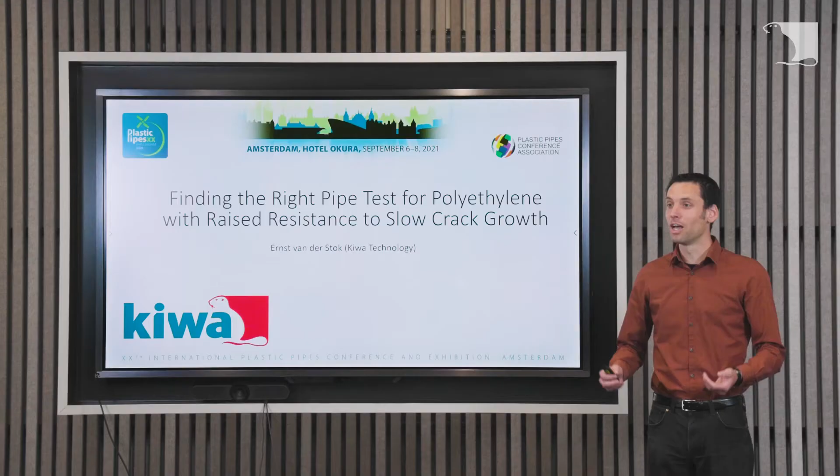I work as material scientist and consultant at Kiwa Technology here in the Netherlands. I really have loads to tell you, but unfortunately I only have 15 to 20 minutes for this presentation, so please read my full paper to get all the details. I'll try to give you some highlights here.

Like I said, it's about two pipe tests. The first is the accelerated notched pipe test, which measures the pipe's resistance against surface damage, for instance due to a scratch from unintentional installation damage. This scratch can grow further and eventually crack the pipe, so this test measures the material's resistance against it.

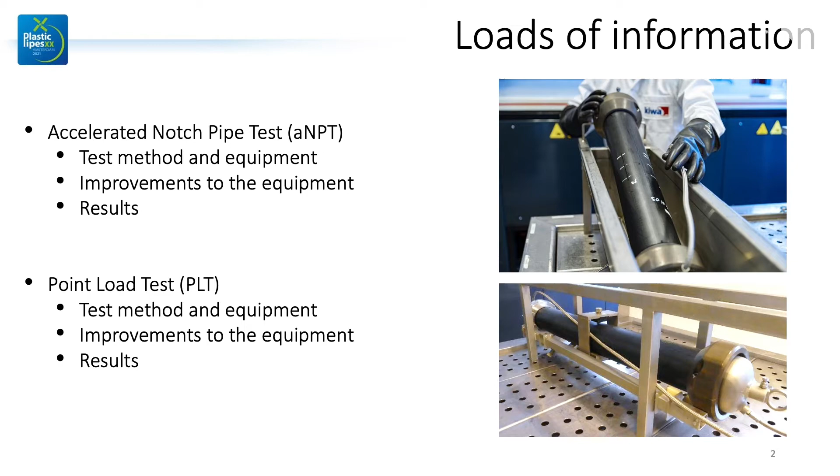The other test is the point load test. Here, the polyethylene pipe is installed perfectly well and is all undamaged, but somehow a point load, such as a stone, presses upon the pipe, causing tensile stresses on the inner wall of the pipe, which may lead to a crack. So the point load test measures the material's resistance in this case.

In this presentation I'll give you an overview for both tests about the test method, the equipment we're using, and note that these tests are still under development. We have a lot of lessons learned that I'd like to share with you so we can all benefit from it. I'll also give you some results, which are quite interesting. So let's go through it.

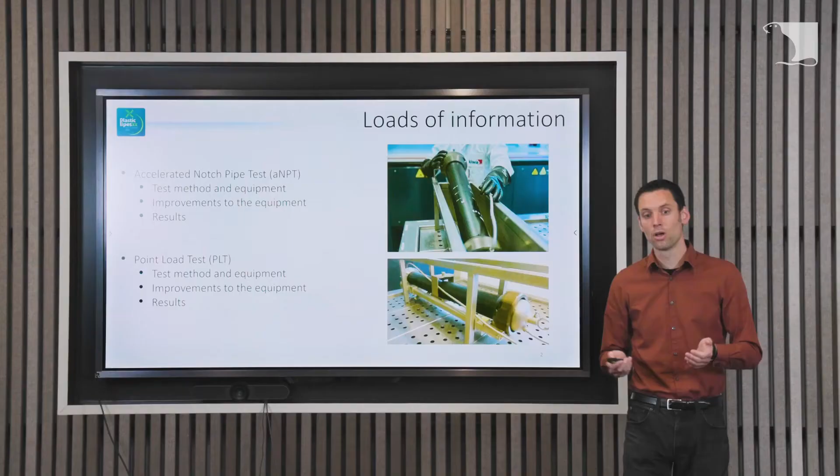First up is the accelerated notch pipe test, or perhaps better, let's start with the normal notch pipe test. So what is it? Here you see a plastic polyethylene pipe installed in a water bath, with four notches cut in the circumference around it.

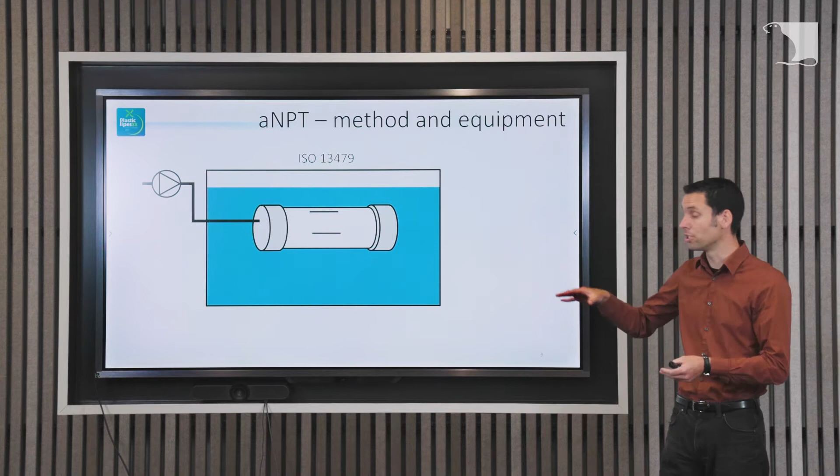The water bath is at 80 degrees centigrade, a higher temperature to accelerate the test. We have a pump to pressurize the pipe, so it's a sort of hydrostatic pressure test, but now with four notches on the circumference.

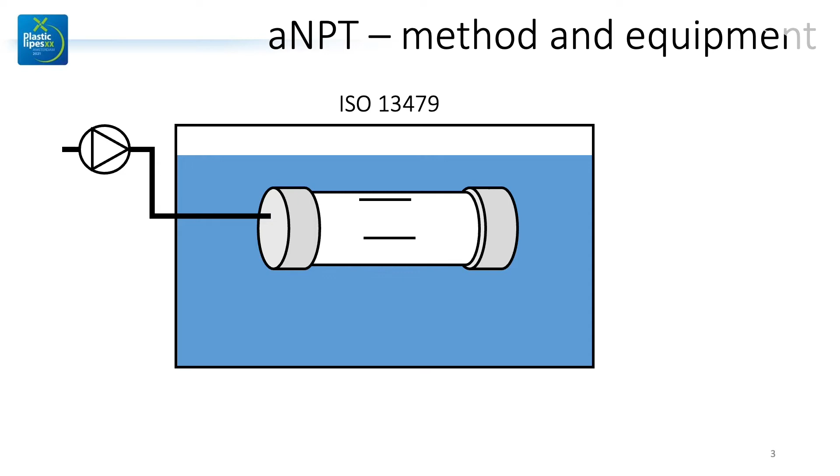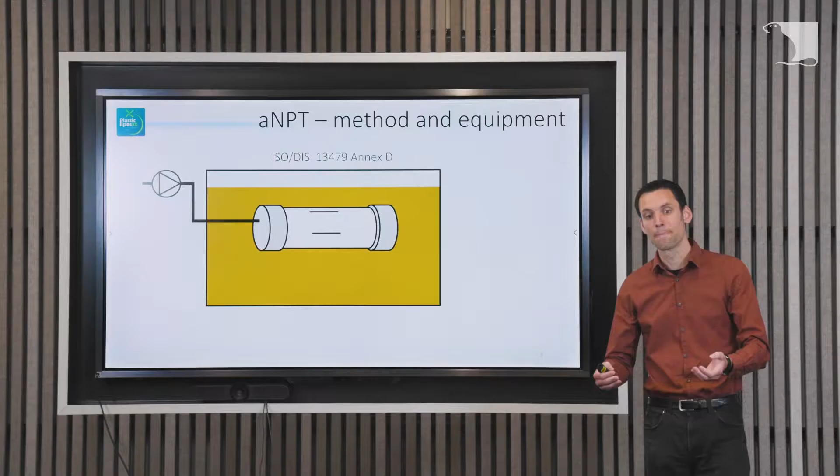The only issue is that for this pipe, polyethylene pipe with raised resistance to slow crack growth, it takes too long to fail within a reasonable time. So what can we do to accelerate it? We put in a detergent, so now the pipe is submerged not in water but in a detergent solution, which accelerates the test spectacularly.

This is also being standardized. The notch pipe test is already in ISO 13479, and this detergent method will be standardized in a separate annex and published soon. Please note that although the pipe is placed in a detergent solution outside, inside the pipe is still just water, not detergent solution.

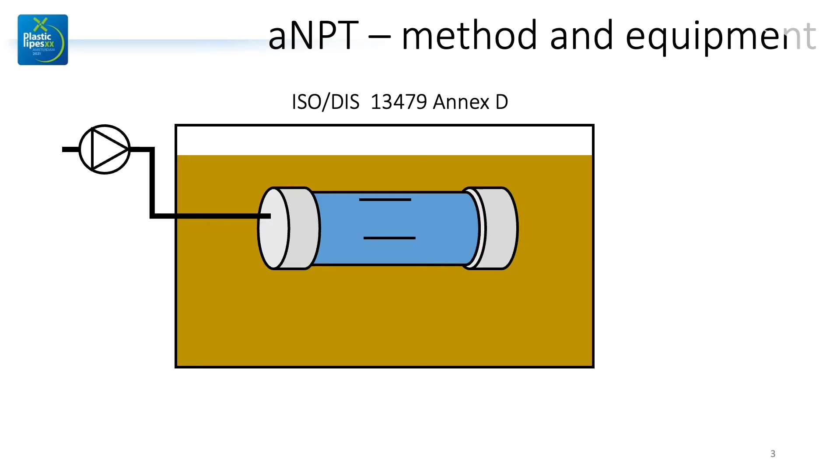The only problem with the detergent solution on the outside of the pipe is that it's a water tank of 1800 liters, and the detergent used is Arkopal, which is toxic and bioaccumulative. That means it's not very eco-friendly to dispose of the 1800 liters of detergent solution after every test.

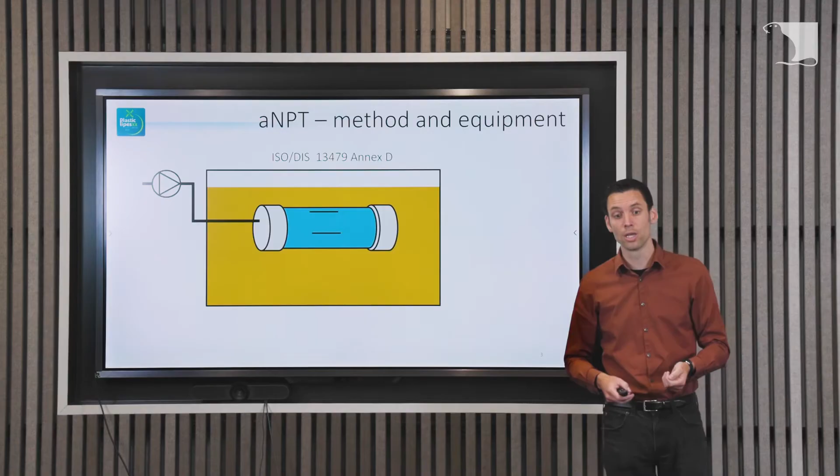So we wanted to make a more eco-friendly test. What we did is make a smaller container, which holds just 30 liters of detergent solution and is perfectly well fitted to hold the pipe and accelerate the test properly.

The only point here is that Arkopal also sinks to the bottom if it's not flowing. Normally in the large water tank it's all circulated for homogeneous temperature, but within the smaller container we don't have that circulation. So in this case, we added a separate pump to circulate the detergent solution inside the smaller container.

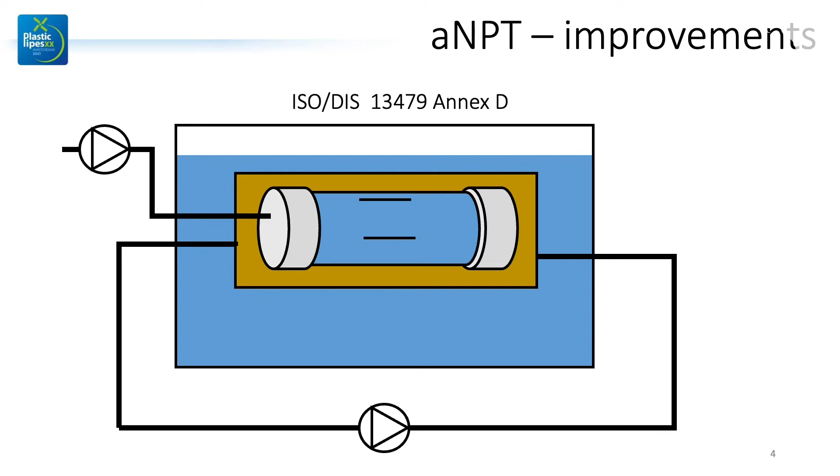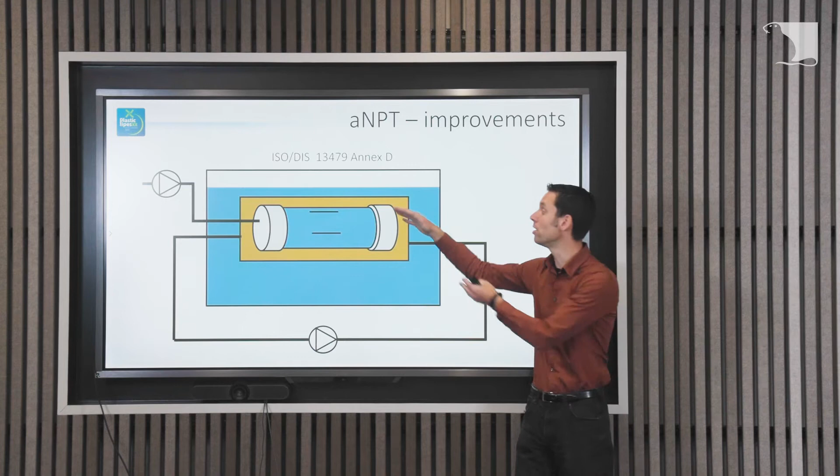It's very important that the solution is homogeneous and that the detergent really reaches all the notches, not just being aggressive to the notches on the bottom side of the pipe and not the top side. Therefore, we did some extra tests.

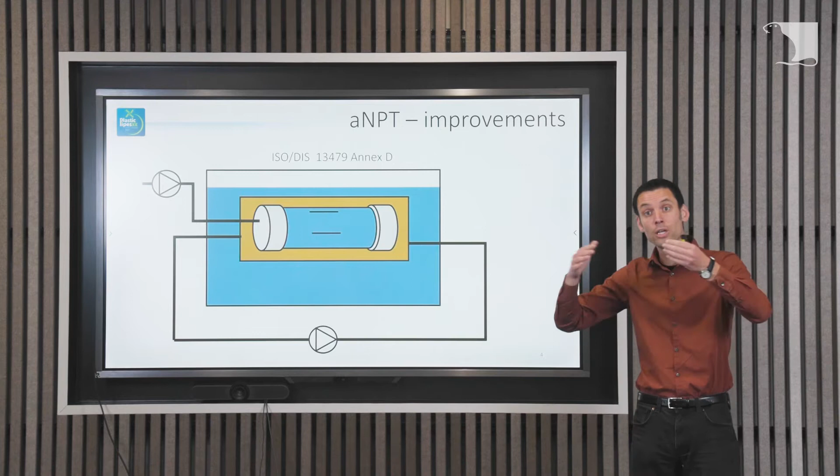So how did we do it? We simply replaced the detergent by colorant. We have a green colorant and we tested the circulation equipment to see if the colorant is really distributed, a little bit turbulent, and really gets the solution

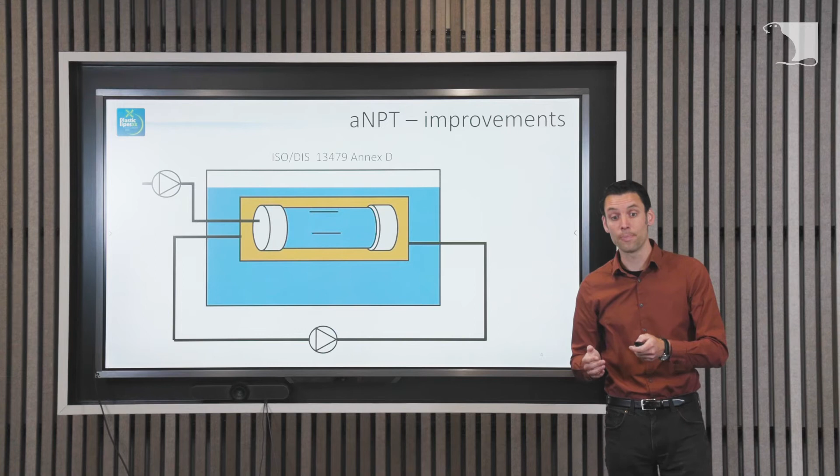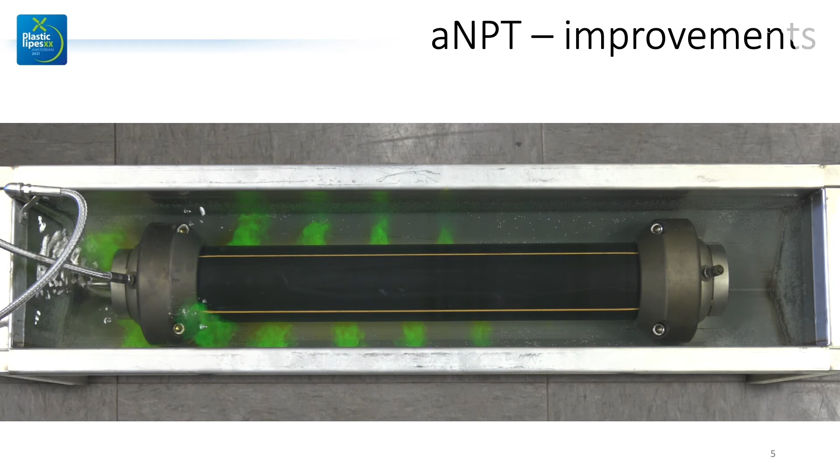homogeneous. So we made a video of it and I'd like to show it to you right now. Here we see that smaller container, we see a polyethylene pipe in the middle and we have end caps. And what we're doing now is we're letting that detergent solution enter that container.

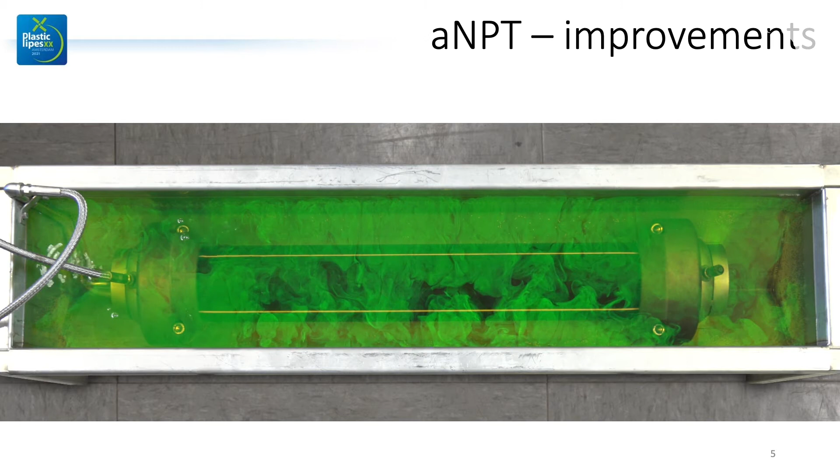So you see really, it's not the detergent solution, it's the colorant. Here you see the green colorant really circulating very nicely around that pipe. It comes to all the areas in the smaller container. So actually in a few minutes time, the complete container is completely green and it's all homogeneously distributed.

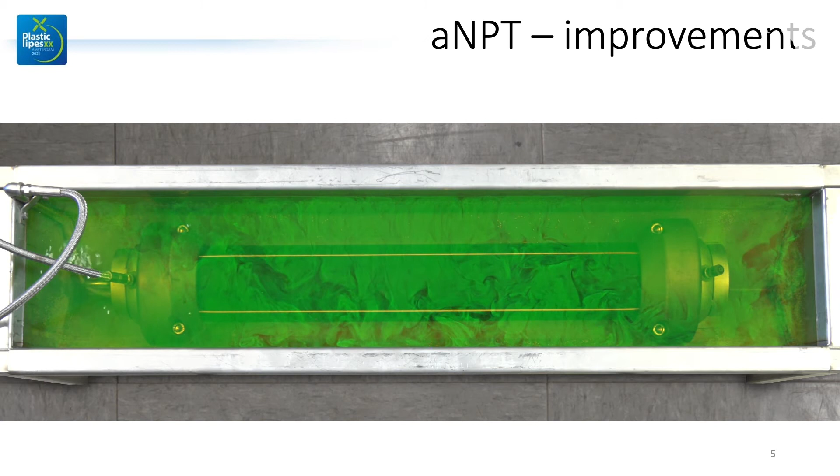So we were very happy with it. It really gave a good sense that we are very good at circulating that detergent solution inside our smaller equipment and that it will work very fine. And we also therefore participated successfully in a round robin that was organized by the PE100+ Association. So we're really confident that we're performing this test in a proper way.

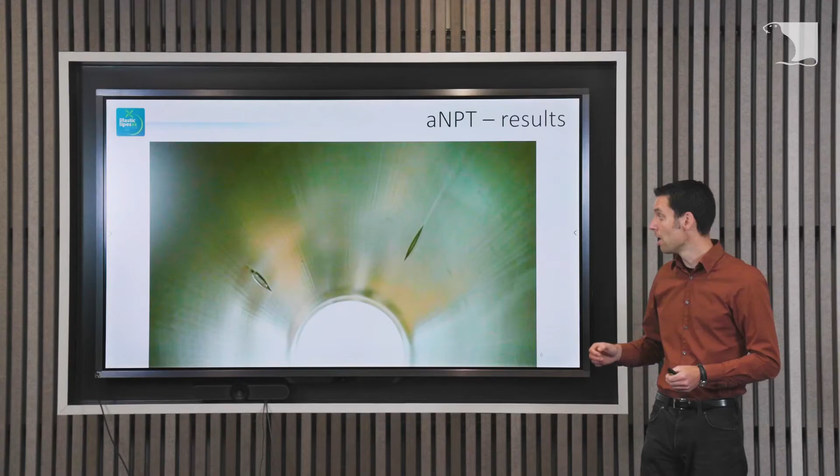So what about some results? Well, here I show you a picture of a failed notched pipe test, an accelerated notched pipe test. It's made from the inside of the pipe. So we're looking at the inner wall of the pipe and we actually see two notches, which is sort of

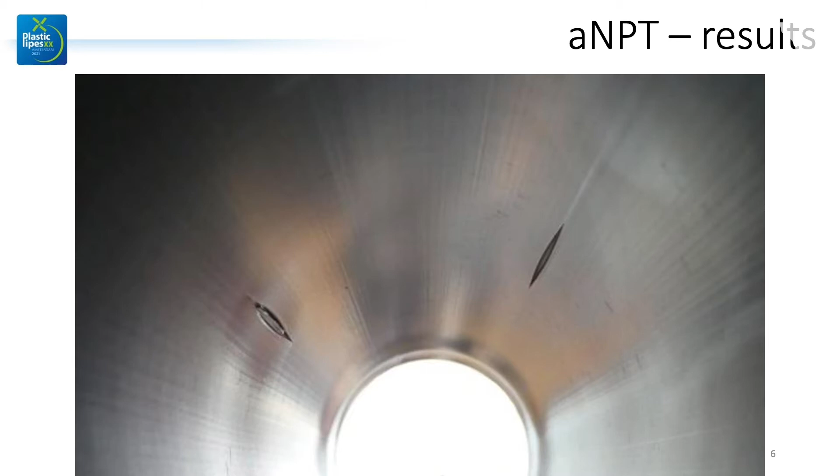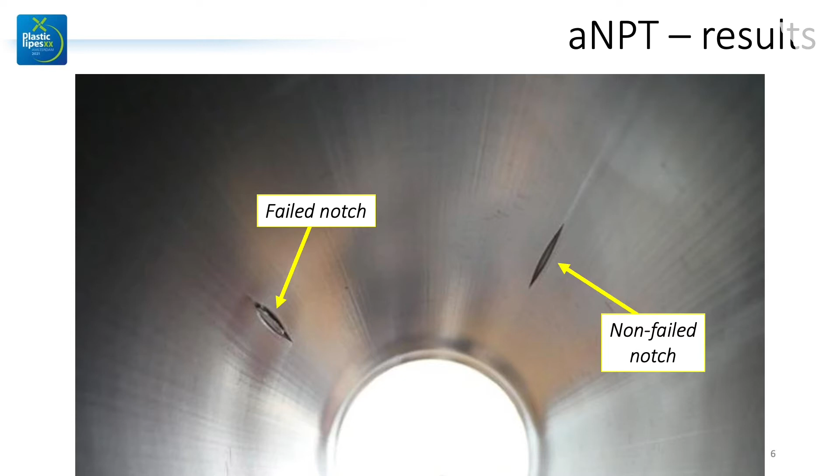strange on one hand because the notches are made on the outside of the pipe, but now we see the notches on the inside. And of course it makes sense if the notch failed, but the other notch we are seeing did not fail. And the other two, because there are 4 notches, the other 2 we couldn't see on the inside of the pipe. So that seemed to be interesting.

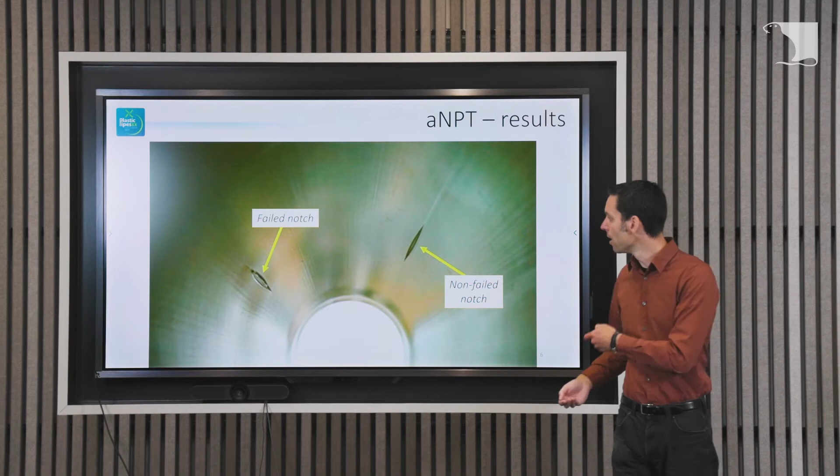What we did was we made a cross-section of those notches to see what is actually happening here. Now what's happening here? Here you see that pipe wall thickness, so you see just the pipe wall and on the bottom side here is the notch.

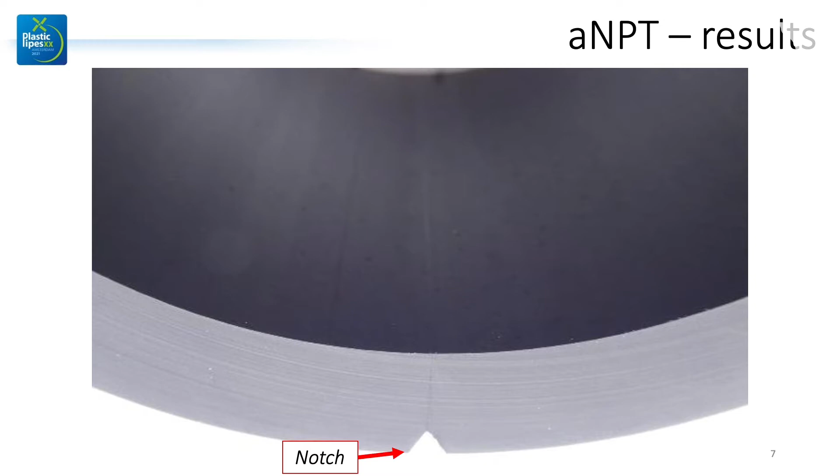And what we see further on, well, we don't see anything on the inner pipe wall. So this was one of those 2 notches that didn't crack completely through, or we didn't see on the inner side wall. But what's very interesting, and it's very difficult to see, but you can see it quite clearly on a microscope, is that there's actually a fine line over the ligament, starting from the notch to the inner pipe wall. And this is actually quite strange.

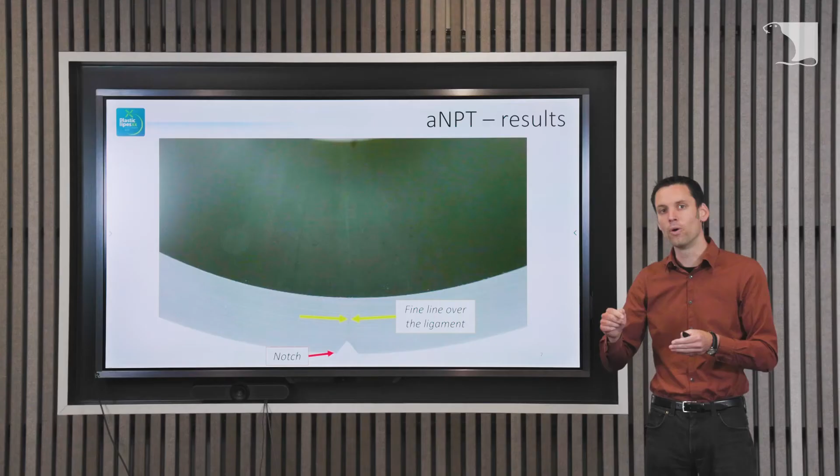I was quite surprised by it because you would expect that a crack would start at the notch tip and you would see something there. But now suddenly we see over the entire pipe wall, before it even failed, we already see a fine line. So apparently something is already happening on a microscopic scale simply due to increased stress in this area.

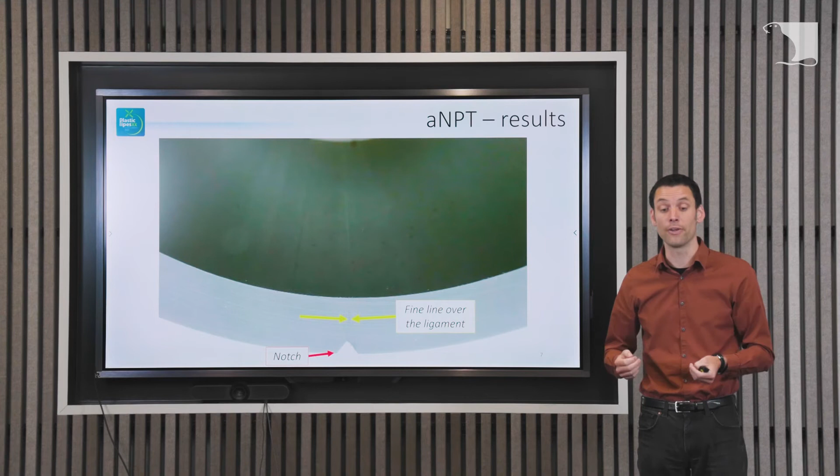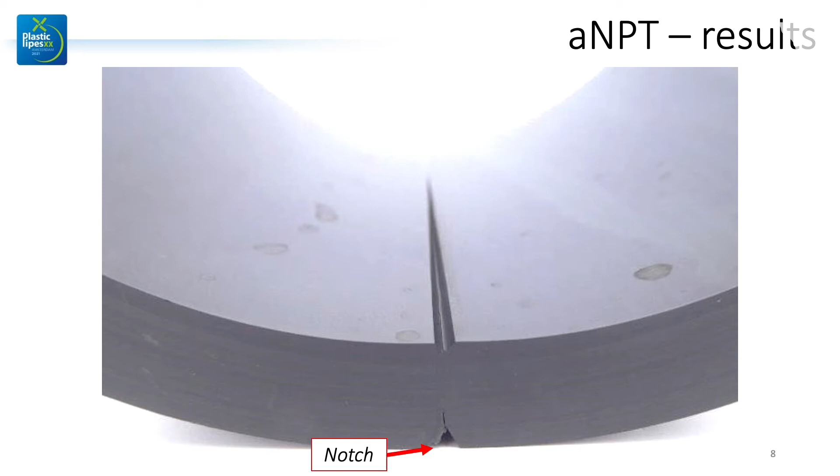Now if you go to the other notch that didn't fail, but we did see on the inside, we see this cross section. Again, we see the pipe wall, on the bottom side we see a notch, and in this case we do see a starting crack. But the crack isn't completely through the pipe wall, it's just a starting crack.

Then we have that fine line again, and then something strange happens again, because on the inside of the pipe we suddenly see some indentation, some ductile flow apparently. So a pipe wall has residual stresses due to the production, and we have compressive stresses on the outside and tensile stresses on the inside. So apparently, because the crack is starting, those stresses have to redistribute over the pipe wall, and therefore we get an indentation or some flow of material on the inside because of the residual tensile stresses.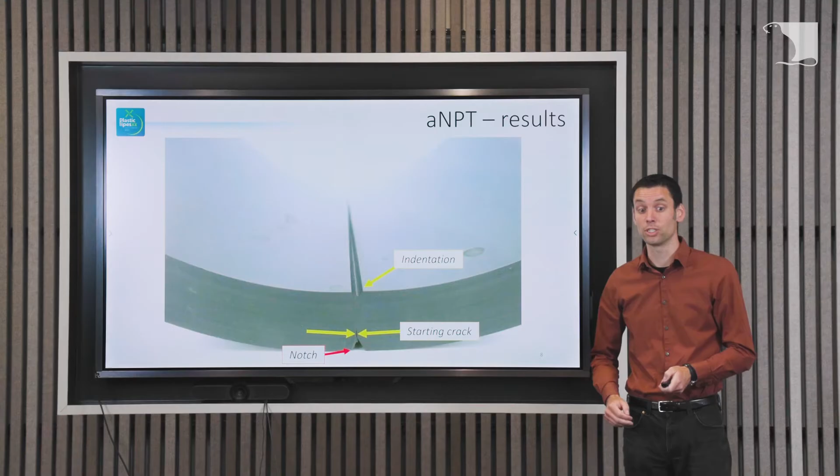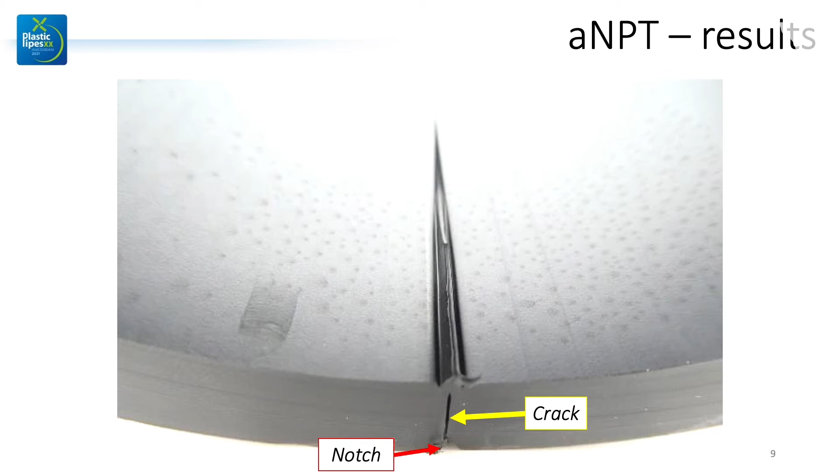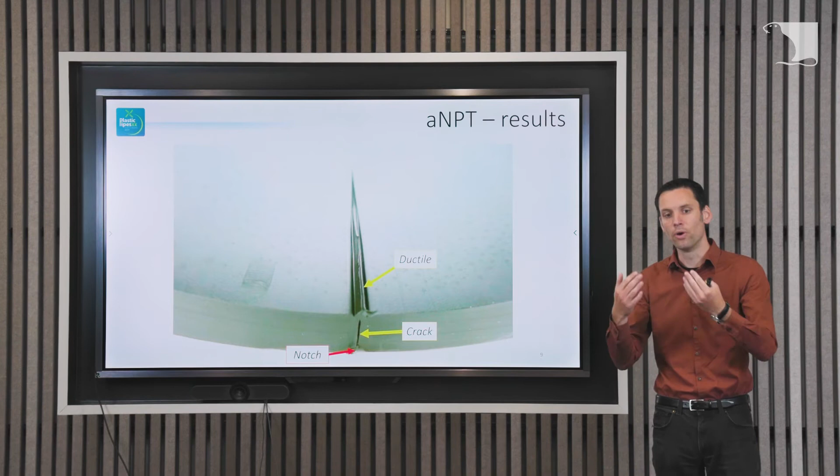Now the final crack that we can see here, because it completely went through. Here we see the notch, we see a crack, and we see some ductile behavior on the inside. The crack is slow crack growth, so it's really brittle, but the end part, the ligament, is then so small that the pressure will deform it ductile. So we thought these are really interesting results because they gave us a very nice insight into the failure mechanism of the polyethylene pipe in the accelerated notch pipe test.

So this was a really quick overview of the accelerated notch pipe test, which simulates a scratch already in the pipe due to, for instance, stress installation. But now what about the other test, the point loading test?

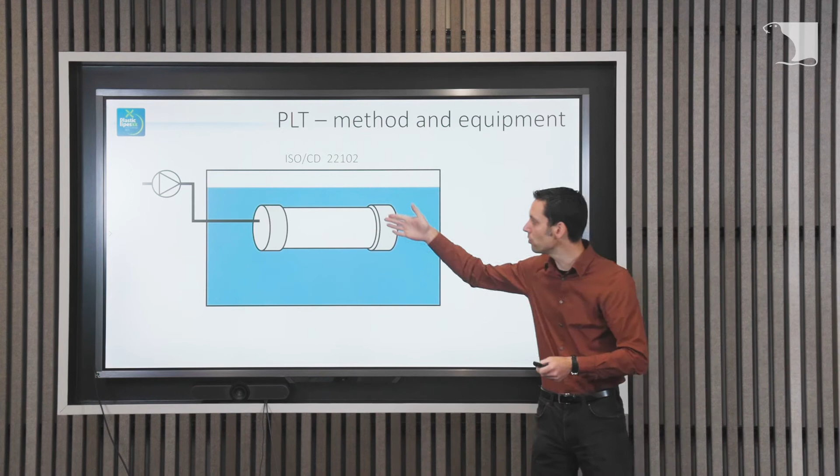The point loading test is actually also a hydrostatic pressure test. So again, we have that polyethylene pipe, end caps, a pump to pressurize the pipe, and a water tank, which can be 80 or perhaps even 90 degrees. But in this case, we don't have any notches on the pipe itself.

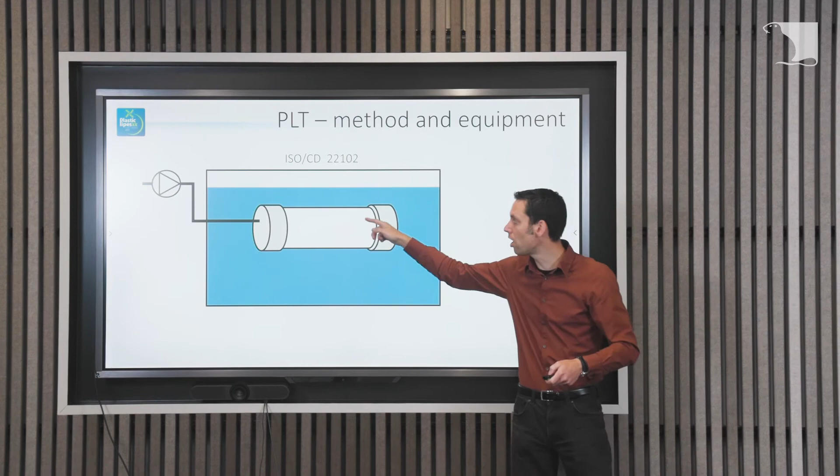We have a point load, and on the other hand, a support, of course, otherwise you're just pressing the point inside the pipe and the pipe will bend. So you have to support the pipe.

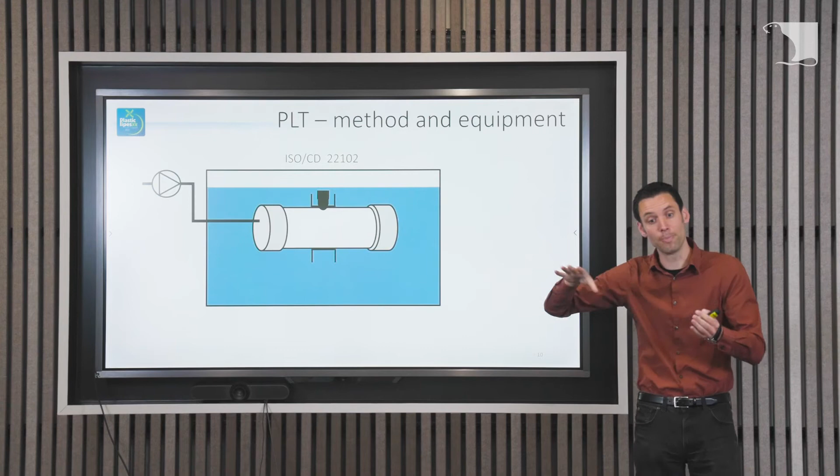Now in this case, it will just take too long to fail like this. The temperature isn't enough to accelerate the test properly. So we need the detergent again. But in this case, the tensile stresses due to the point load come from the inside.

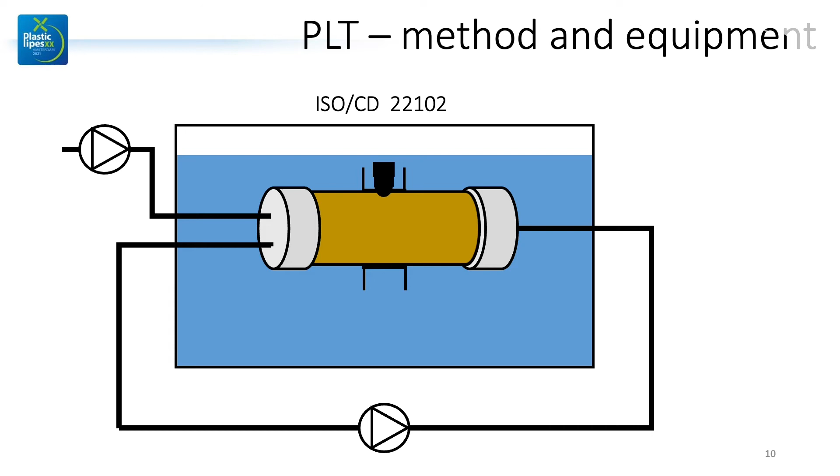So therefore we need that circulation pump again, and that will distribute the detergent through the pipe. And then we have detergent inside the pipe in this case.

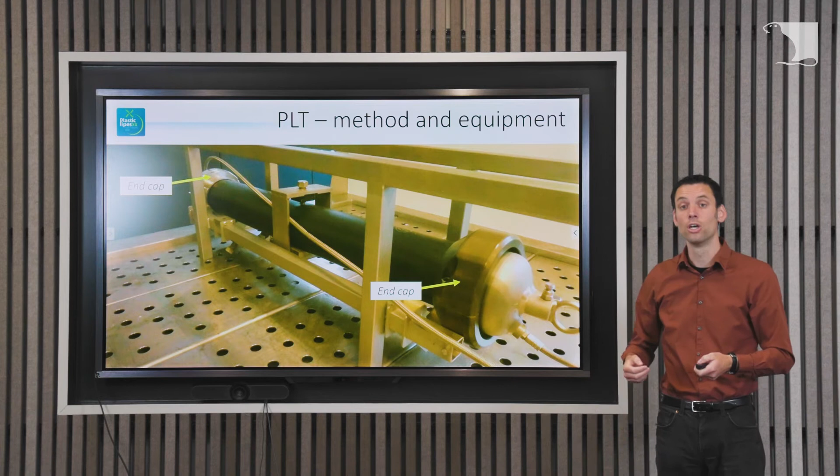So this is a picture of our test setup. You see two end caps of the pipe, which have those hoses to circulate the detergent. It also has a connection for pressurizing the pipe, and we have the point load.

Here you can see it, and of course the support. So it's difficult perhaps to see, so here's a bigger picture. This is where the pipe is placed inside.

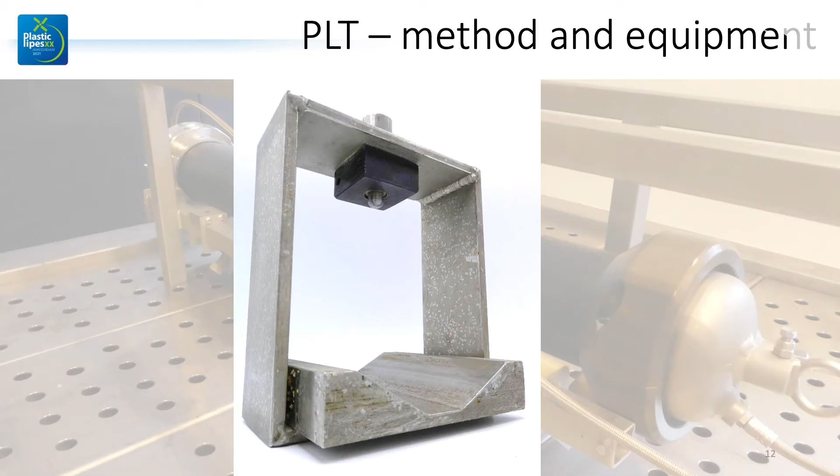The point load has a tip radius of 5 millimeters, so the diameter is 10 millimeters. And in theory, it's a quite easy test, but it's still under development. We are working on it with two other labs, SKZ and TGM, and it's quite difficult to get it working.

Now, what was the first problem? For instance, the detergent we were using in the beginning was at 90 degrees. So what did it do? It attacked all our rubber connections. We have rubber like Viton, for instance, and these are pictures by SKZ, showing Viton rubber is attacked very strongly by the detergent at 90 degrees.

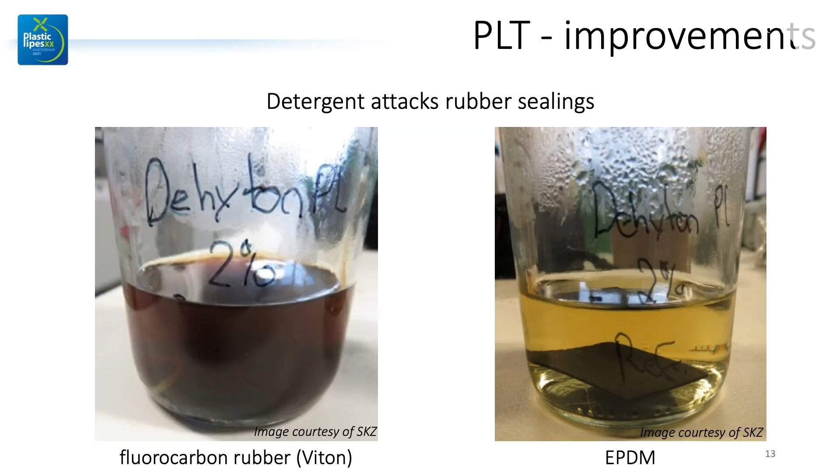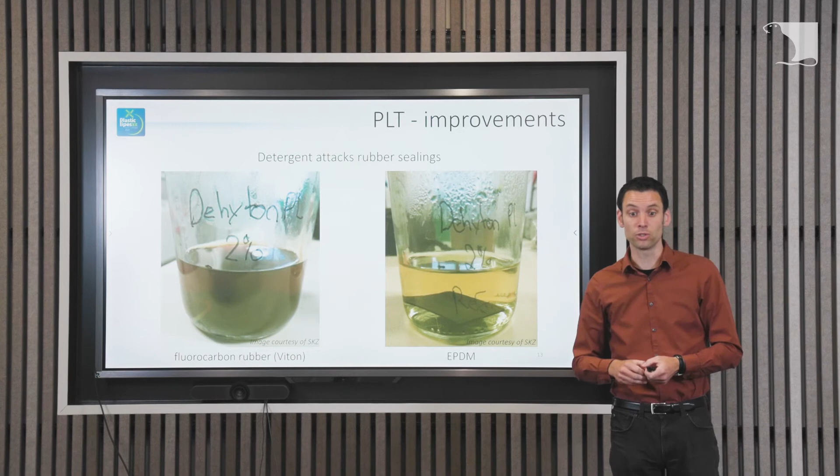So all our quick fix connections started leaking. We have rubber used everywhere, also in the circulation pumps, for instance, so we had to replace them. The quick fix connections we replaced with simple screw connections, but the rubbers in the pumps we replaced with EPDM, which had a much better result and were much more resistant to the detergent.

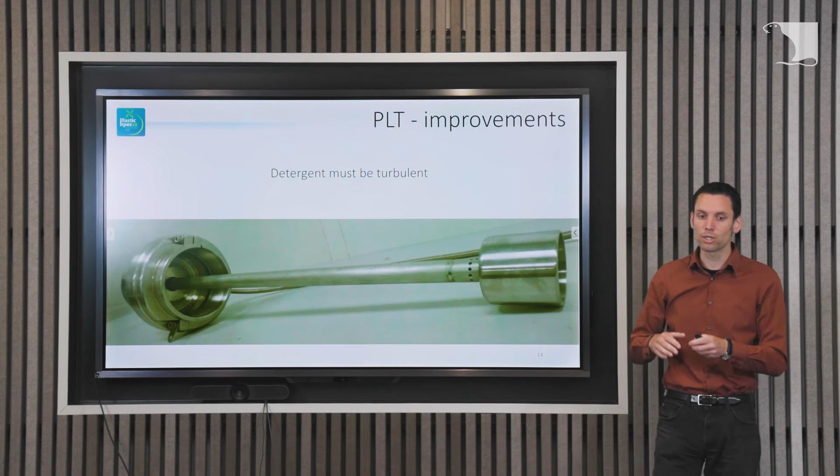The second point is, how is the flow of the detergent inside the pipe? It must be turbulent. It must get to that inner surface where the point load is pressing on. So what we did, we made a sort of internal spray system, which is already used by one of the two other labs. So here you see it.

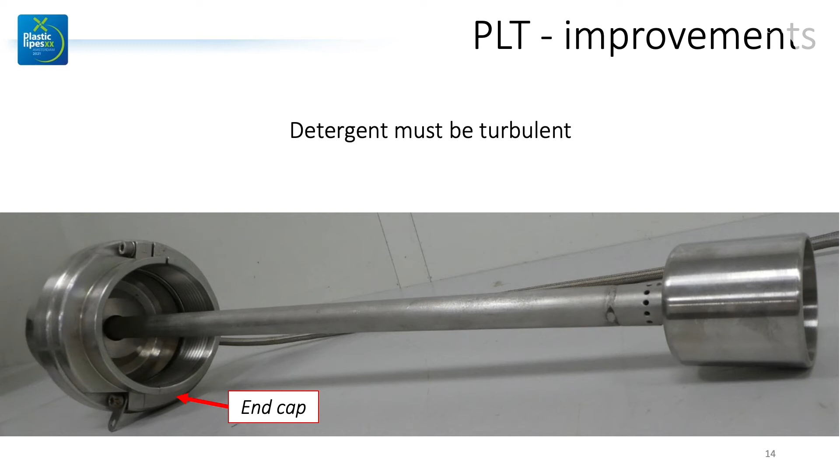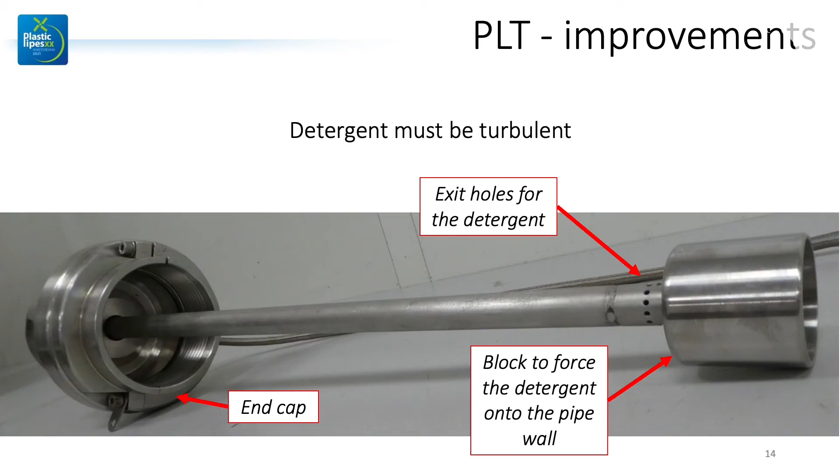It is an end cap, then you have a sort of rigid hose, which has some exit holes on the outer end for the detergent. And we have a block, so really the detergent is forced exactly at the spot where the point load is. So this is what we did, still under development.

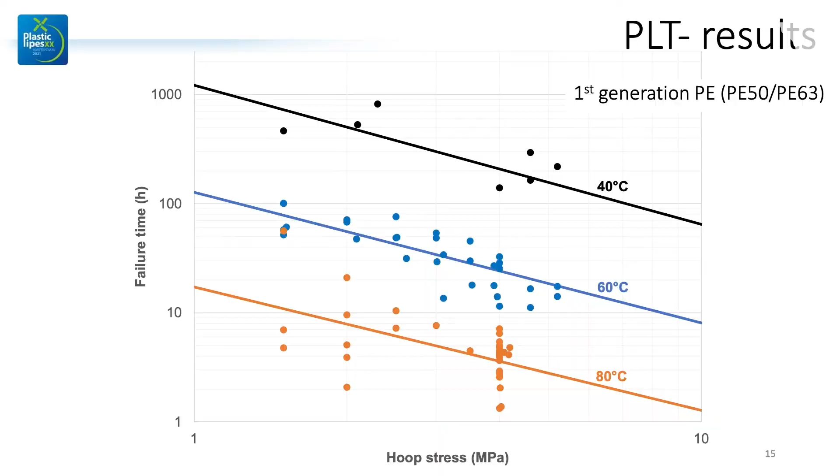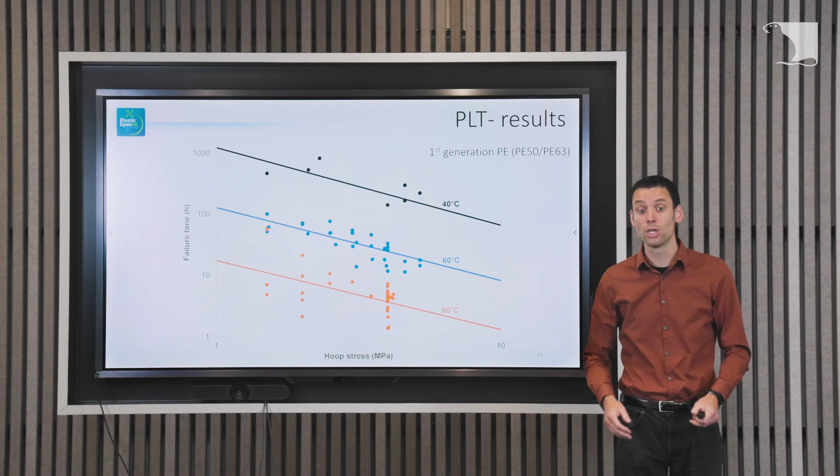One of the pieces of advice to end users or pipe owners was: if you have problems with point loads, reduce the internal pressure - that really helps. We also extrapolated our results. We tested at 80 degrees, 60 degrees, and 40 degrees, so you can extrapolate to soil temperature and take into account the acceleration factor of the detergent. Then we can see what time it would take for the first generation to fail due to point loads. That came out in good agreement with practice. If we extrapolate these results, we arrived at 35 years, and the first point load failures in the Netherlands were after about 35 years in use. So it really gave us confidence that we get a good result with the point load test.

But then the pipe owners asked: that was the really old first generation polyethylene pipe, what about the second generation? So the PE80, the high density PE80s. These pipes do have a comonomer inside, but they're not made with a two-step polymerization process, so the polymeric chains in the material aren't really linked as long. So what about that second generation? We tested them as well, and here are the results.

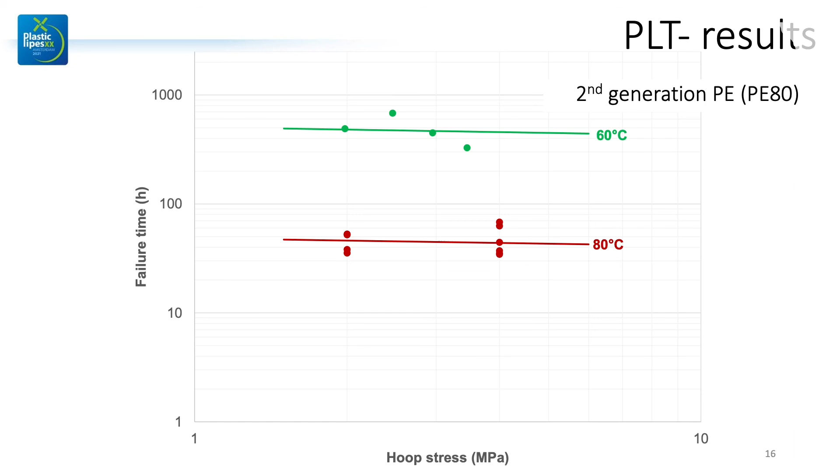On the vertical axis is the failure time, and the hoop stress on the horizontal axis. We don't see any dependency on hoop stress anymore with the second generation. We also didn't test at 40 degrees because it would take too long. And with that, you already see the improvement in material.

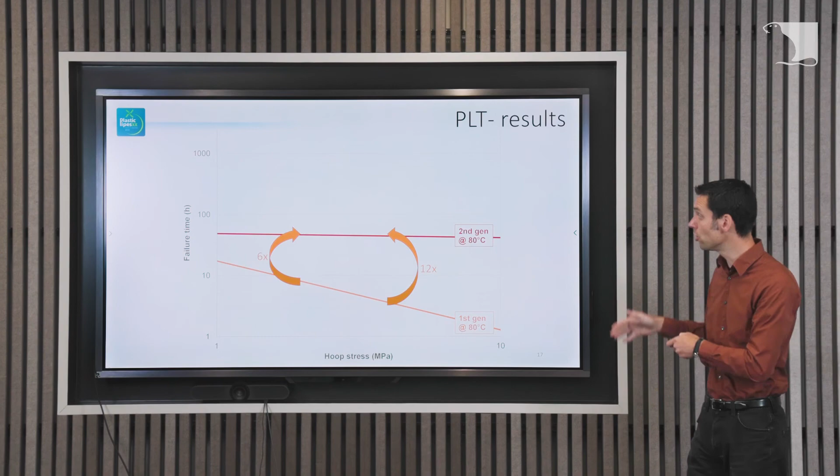You see it even better here. In this graph I just show the 80 degree centigrade lines, and you see that the second generation polyethylene is 6 to 12 times as good as the first generation. If we look at the 60 degree lines, it increases even more - it's 9 to 19 times better for the second generation. So we could again extrapolate that, and our advice is we don't expect any point load failures in the next decade for second generation pipes.

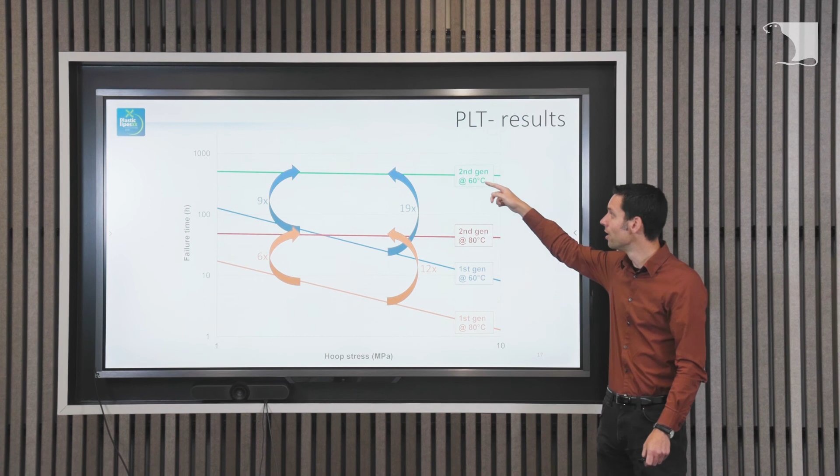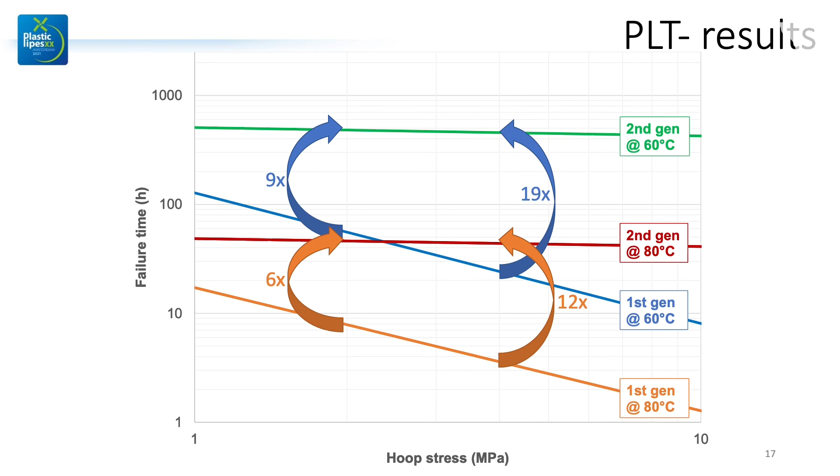Of course exceptions and incidents could still take place, and second generation polyethylene isn't really designed to be installed with point loads such as PE100RC. So what about PE100RC? You already see we're almost at the 1,000-hour line for second generation, and for PE100RC we have a lot of difficulty getting the correct acceleration. So we're still looking for the right test parameters - which temperatures do we need, which detergent do we need.

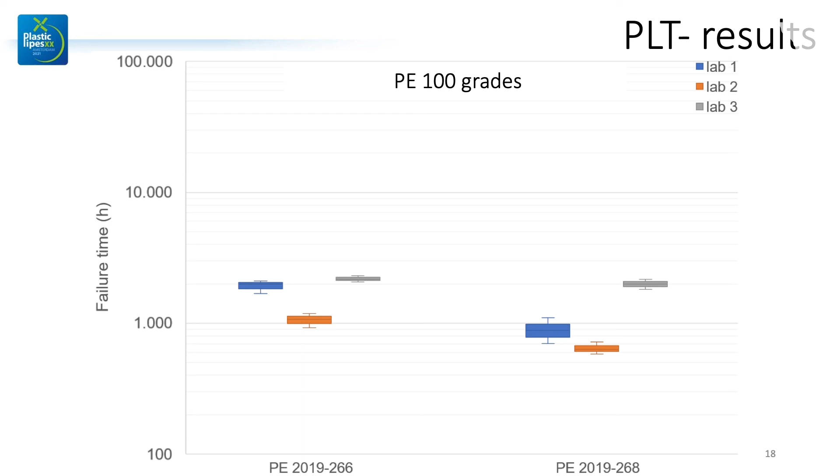But first, let's take a step back. What is the agreement between these three laboratories, Kiwa, SKZ and TGM, about the failure times - how do they correspond with each other? So that's what I'll show here. For two materials, coded 266 and 268, here are the failure times in these three labs for PE100 grade, tested with Arkopal. You see the failure time is a little higher because Arkopal isn't as aggressive to the polyethylene.

What we saw is that the scatter within one laboratory is really low, so we're really happy about that. Between the three labs there is some scatter, but that's also normal for standard hydrostatic tests - you have the same amount of scatter with the notch pipe test or the accelerated notch pipe test. Nevertheless, we had a lot of good discussions about the results, really improving the test method and harmonizing it more - great thanks to the ISO working group for those discussions. We're quite confident that with a better detergent to accelerate the failure time even more, the scatter between the labs will also be much smaller.

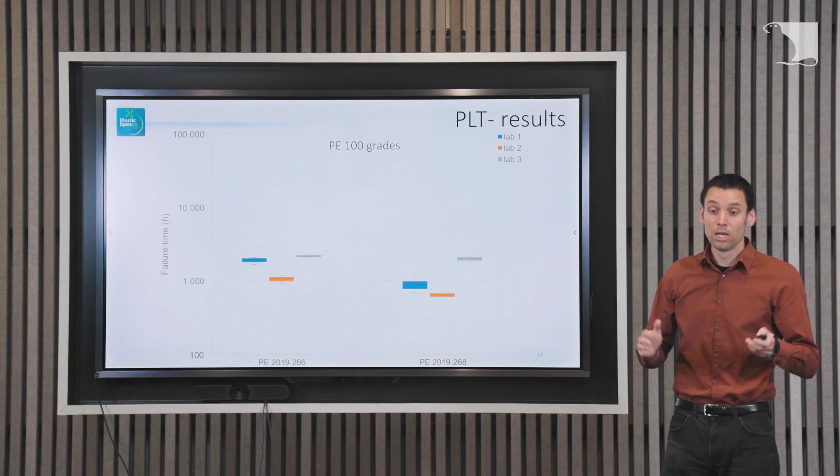So that concludes my presentation. I've shown that the accelerated notch pipe test and the point load test are two promising tests still under development, and they gave great acceleration to test polyethylene with raised resistance to slow crack growth. Please stay in touch, and don't hesitate to contact me or my colleagues if you have any further questions about these topics.